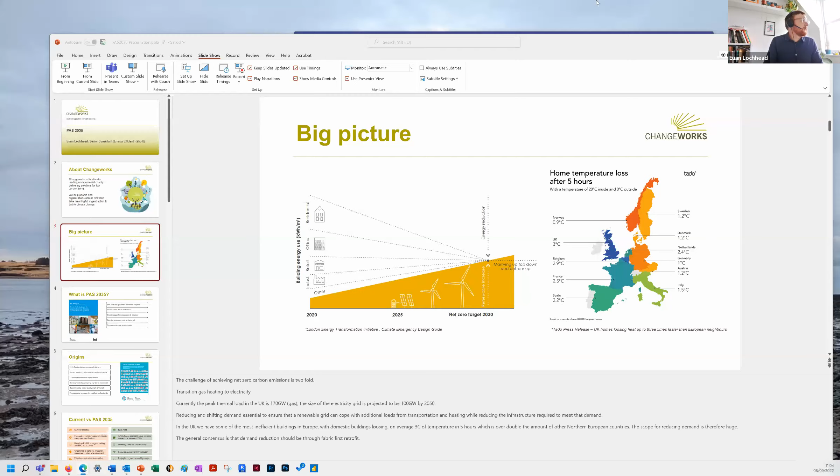Right. Right, is that better? Is that cycling through? There we go, that's it, yeah. Right, good, sorry. Yeah. Lovely, thank you.

So yeah, it helps when you can see these when I'm describing the challenge. So really, this shows what I was talking about just there, that the general consensus is that demand reduction should be through fabric first retrofit.

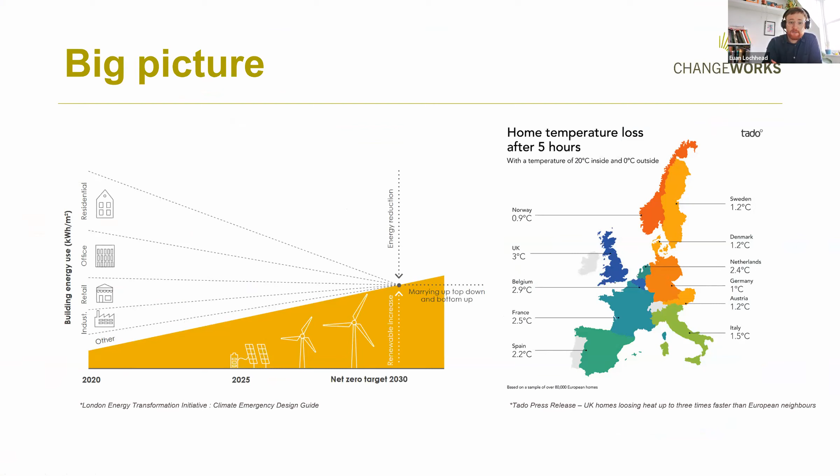So where does PAS 2035 come in? PAS 2035 is currently non-statutory guidance for retrofitting dwellings to improve energy efficiency. It's focused on a whole house fabric first approach to retrofit, and the key elements of it are that it requires an assessment prior to carrying out retrofit works to identify dwelling specific risks and constraints.

With the exception of the simplest measures, retrofit measures and interfaces between measures must be designed for the specific building, and the performance of buildings must be evaluated at the end to ensure predicted savings are achieved in practice. And it's also worth saying what PAS 2035 is not. It's not an energy standard. It's purely about this process of retrofit. So it doesn't set any targets for where we need to get to.

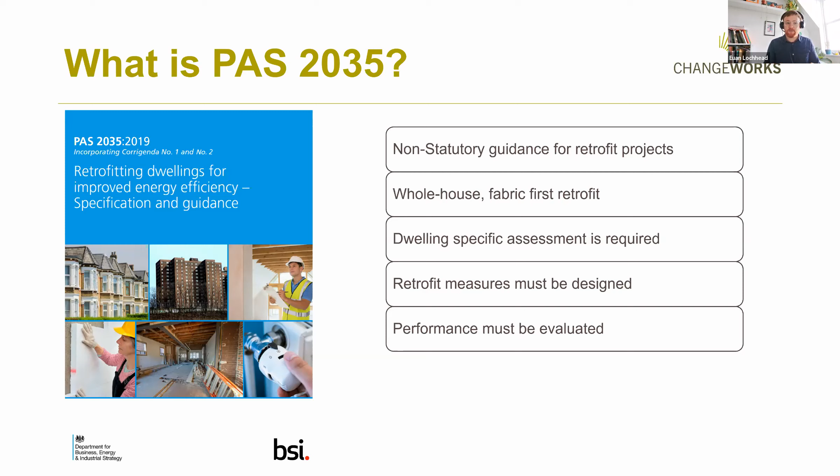The origins of PAS 2035 are in the Each Home Counts review, which was by the Department for Business, Energy and Industrial Strategy. And that review really found that current practice focused too much on single measures like you'd find in your EPC. And it gave 27 recommendations for improvement of domestic retrofit.

One of those was an overarching standards framework, which is really where PAS 2035 has come from, and their recommendation was that that was overseen by qualified professionals, and that there would be a new quality mark for retrofit, and that quality mark is TrustMark, which is the certifying body for PAS 2035 compliant retrofit in the UK.

So the difference between current practice and PAS 2035. Current practice, as I say, is focused on single measures. And when I say single measures, it's usually recommendations from an RdSAP assessment. And currently grant funding has kind of been designed around these measures. And PAS 2035, by contrast, looks at a whole house approach. So considering the interaction between energy efficiency measures, for example, the impact that improving insulation has on ventilation, and I'll go into that in a bit more detail later.

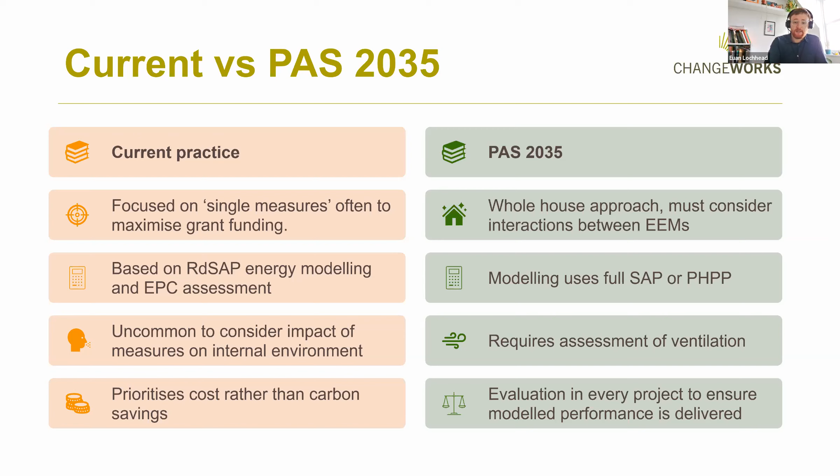In current practice, it's uncommon to consider the impact of measures on the internal environment, whereas one of the key aspects of PAS 2035 is to ensure that the measures carried out don't lead to inadequate ventilation, for example. Current practice prioritises cost rather than carbon savings. PAS 2035 balances both cost and carbon savings, and also includes evaluation to ensure that projects are delivering the energy performance that they were modelled to deliver.

And a key bit of terminology in PAS 2035 is unintended consequences, and this is what we're looking to avoid through using PAS 2035. So in current practice, some of the unintended consequences of poorly designed retrofit measures have been fabric decay through failure to consider the moisture balance of the existing building and how adding insulation disrupts that balance. That can lead to surface mould and condensation.

That can lead to poor indoor air quality on its own, but also unintentionally improving air tightness can make natural ventilation no longer suitable for the building. Improving insulation can sometimes also lead to overheating, which we might have experienced this summer. The fabric decay in historic buildings can lead to the loss of historic buildings.

And also there's the performance gap, which is the difference between the predicted energy performance from, for example, RdSAP and what's actually been achieved, which is dependent on numerous things such as occupancy factors and the accuracy of modelling. There's the rebound effect, which is not actually knowing exactly how much energy someone uses before. For example, people might underheat their homes if they're in fuel poverty. So the actual savings are less than you would expect.

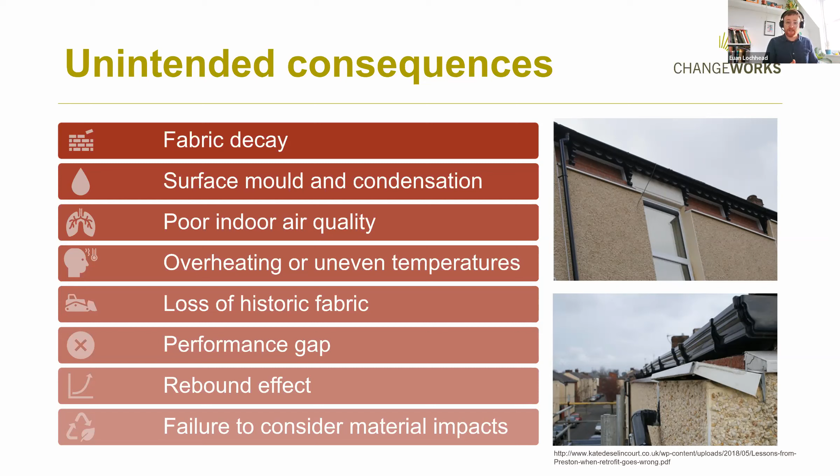So the photos here show some examples of poor retrofit where you've got discontinuous insulation or water not shedding but actually shedding into the building. And in this particular project in Preston, the remediation of those retrofit measures actually cost more than the original retrofit scheme. So we really want to avoid that.

Is it required? This is really the big question. Currently, it's only required for ECO-funded projects, but it is being considered in Scottish Government reviews of energy standards. The response to the ZEST report was that there were plans for a Scottish trust mark, which follows the principles of PAS 2035, but takes into account some of the key challenges we have in Scotland around the supply chain and the skills, which might mean a phased implementation.

But it's fair to say that there's uncertainty about how PAS 2035 is going to be implemented in Scotland and when it's going to be implemented. But there are plans to formalise PAS 2035 as a British standard. I think, in summary, while it's not required just now, it's likely to be required at some level soon, and it's likely to play a key role in the mass rollout of retrofit required to achieve net zero.

So what does the process look like? I'll explain this in more detail in the next slides, but the whole retrofit process is overseen by one professional who is a retrofit coordinator. So the retrofit coordinator is a building professional that has a specific qualification in managing risk in retrofit projects.

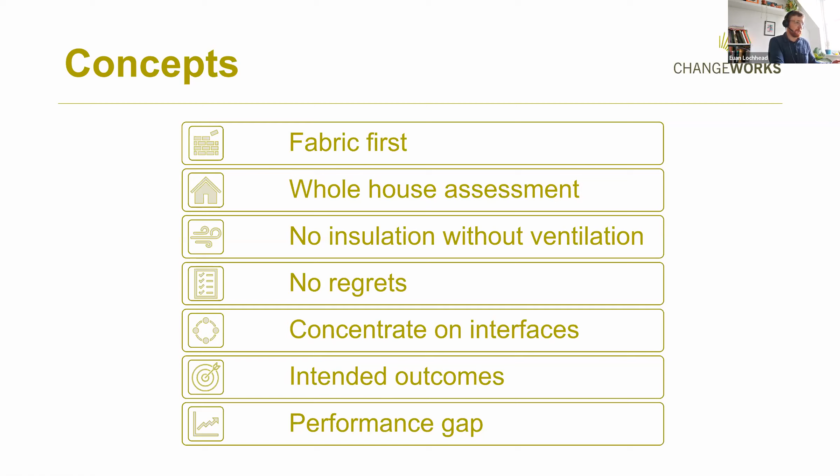And intended outcomes is another key concept, is that we need to establish what we want to achieve, whether that's net zero or whether that's just slightly improved comfort, so that we can establish the performance of the project. And then also the performance gap, trying to reduce the difference between our modeled energy consumption and what we actually achieve in practice.

So just to explain in a little bit more detail of the steps, in risk management, and this is really the first step of PAS 2035, when a retrofit coordinator establishes which risk grade a project has when it's going through each step. So there's 3 risk grades, A, B, and C. So risk grade A requires very simple assessment of the building, whereas risk grade C requires a more comprehensive assessment.

I think for most registered social landlords, projects will be risk path C due to scale, because risk path C comes in when there's more than 30 properties to be improved in a project, or more than 5 measures per dwelling. And I think to get to net zero, it's likely that most projects would be risk path C. Some measures are more inherently risky than others. For example, internal wall insulation has more chance of disrupting the moisture balance, and air source heat pumps require potentially fabric upgrades, so they're always risk path C.

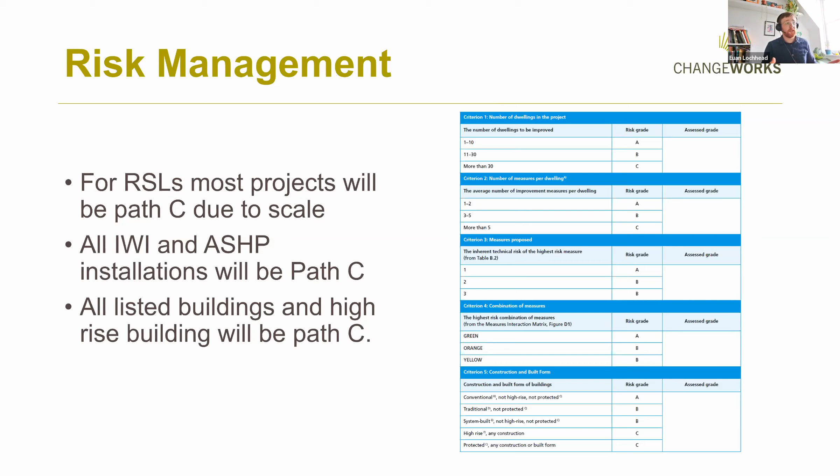And all listed buildings and high-rise buildings are risk path C because of the increased experience of the design team that you need to undertake those projects. And the listed buildings and traditional buildings, all pre-1919 buildings, require someone with conservation expertise.

So once you've established the risk, you can move on to retrofit assessment, and that's based on the risk assessment. And it's really to form an understanding of the existing building, the defects, to make sure that they're remedied prior to installing retrofit measures, and also to understand the moisture characteristics of the current building fabric. This is supported by energy and technical modelling to establish a baseline performance, so that when you get to the monitoring stage, you can understand exactly how much energy you've saved, rather than currently we'd base it on an RdSAP assessment, which might not be representative of the actual energy consumption.

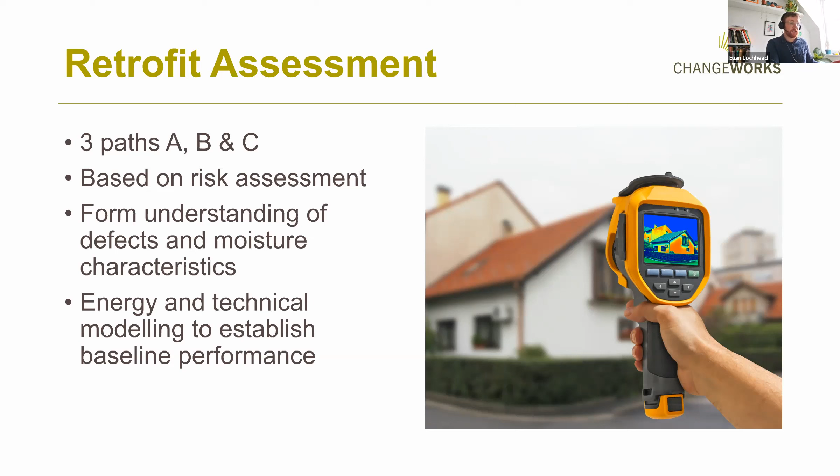Another part of the improvement option evaluation is to establish the payback period and also the carbon savings of each measure, to ensure that we've looked at what's the most cost-effective way to reduce carbon emissions based on a number of improvement packages. And as I've said before, this is based on more detailed energy modelling than currently, more detailed than RDSAP, which has the effect of improving the accuracy of modelling.

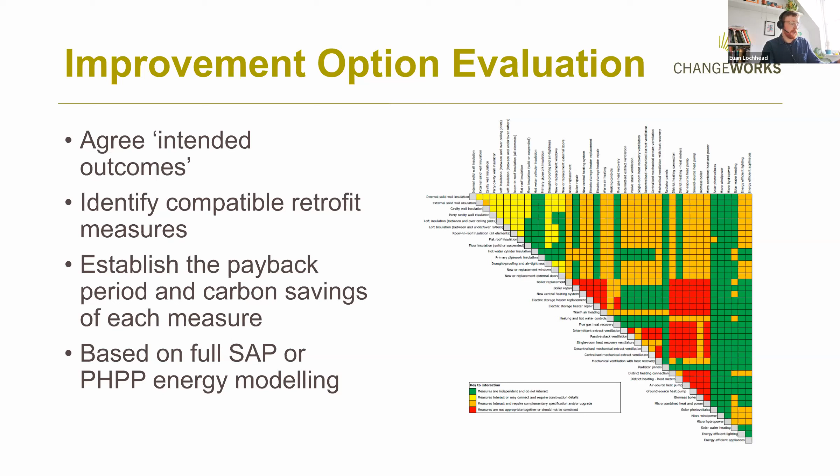Then when we move on to retrofit design, that needs to be tailored to the risk path as well. So more risky projects require more design, and that needs to consider junction details for insulation, the ventilation strategy, overheating assessment, interaction between measures, so how measures actually interact in terms of, as I've said, insulation and ventilation, or services and fabric heat loss, for example.

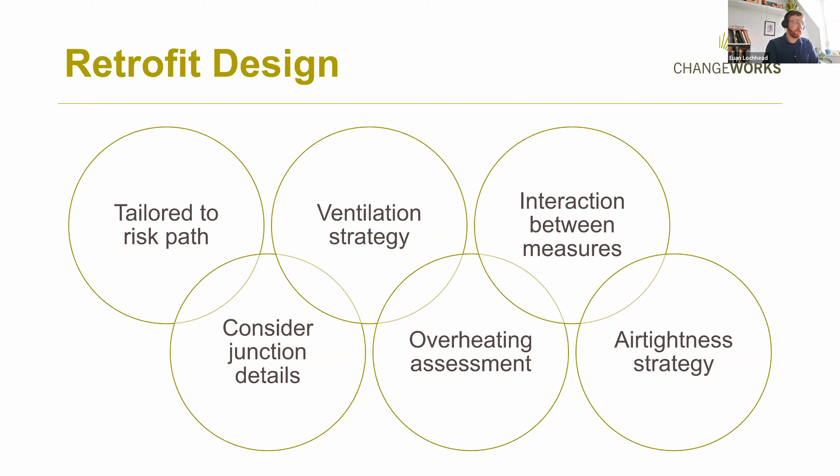And we also need to have an air tightness strategy, so that when we put on insulation, we're not increasing the moisture risk through unintended air infiltration, actually putting a lot of moisture into the building fabric. And then installation is carried out in accordance with PAS 2030, and Jonathan will describe some of the installation projects that Warmworks have done.

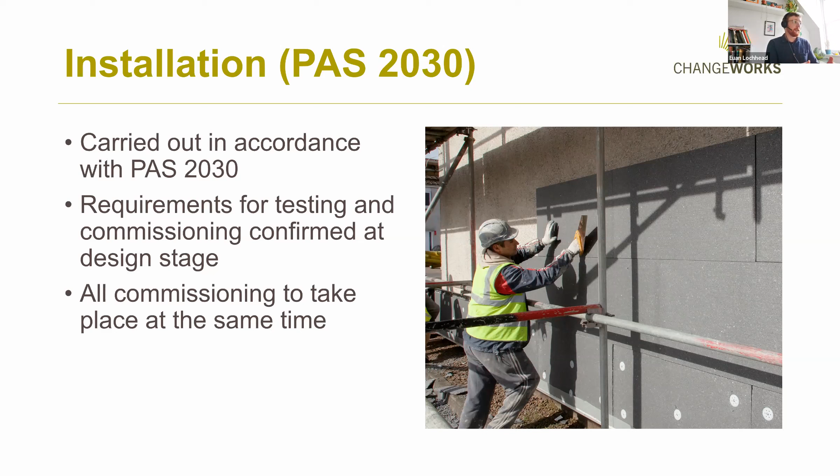And this really covers the requirements for testing, commissioning, and that needs to be confirmed at the design stage. So the retrofit design informs the installation.

And then finally, evaluation. So in every project, you do a basic evaluation, and if it's performing as expected, then that's great. But where it's not, you need to undertake further evaluation to identify exactly where the problems have occurred. And the advanced monitoring might include detailed technical monitoring, such as thermography, air pressure testing, or temperature and relative humidity monitoring.

So the key challenges to achieving PAS 2035: we have a skills gap in Scotland, and in the more rural areas that's more acute. So we need training. Currently the training is mostly provided by the Retrofit Academy down in England, but there are online courses. But it is a big challenge to upskill the industry to meet the step change in practice that PAS 2035 presents.

There's also measures-based funding, which can make it difficult for PAS 2035, partly because, for example, ventilation doesn't have any specific funding, and it doesn't improve EPC ratings, despite the fact that it does, when implemented correctly, improve occupant comfort and can lead to significant energy savings in practice. And there's also uncertainty over implementation, so we don't know to what extent PAS 2035 is going to be used in the retrofit of Scottish housing stock.

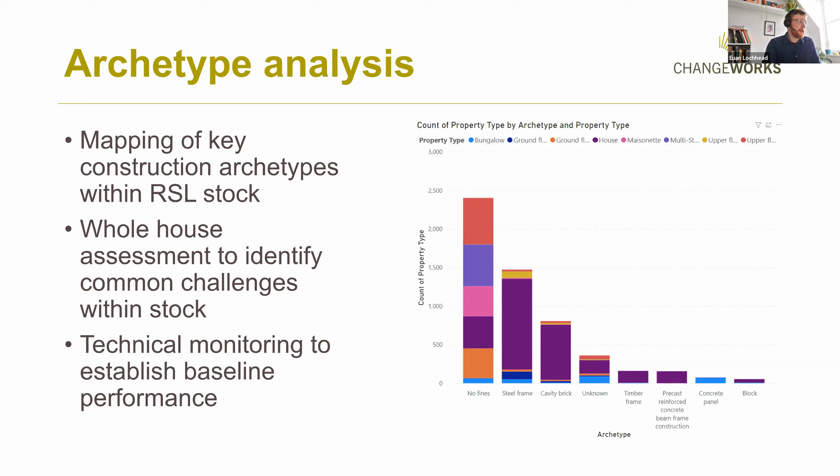So as I've said, archetype analysis is looking at different types of housing within a local authority or housing association stock, and then identifying the construction type. And usually these construction types will have similar approaches that we can implement. So that goes into the strategy development, that we can look at developing a single strategy for a housing stock

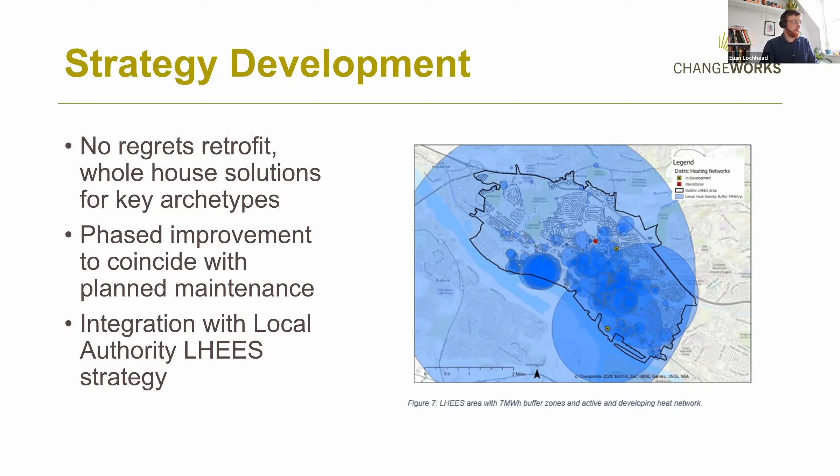based on the construction type, and look at implementing that to coincide with planned maintenance, and also look at integrating with local authority local heat and energy strategies. It makes sense for local authorities and housing associations to be speaking to each other to ensure that we're not significantly retrofitting a project when there's a heat network being installed right next by that requires a different level of heat demand. And we're also looking at integrating PAS 2035 into our delivery.

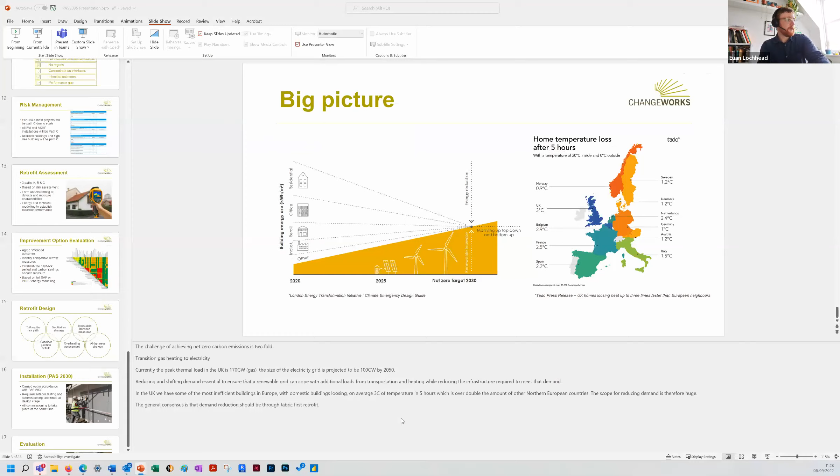So retrofit coordination, this is a service that we can provide from inception to completion. Project management: our team is currently experienced at delivering energy efficiency measures at scale, but we're looking to add the retrofit coordination services into this part of the work that we do, and also quality assurance, our team, to ensure that the appropriate standards and on-site evidence are gathered to ensure that TrustMark accreditation can be achieved when that's rolled out in Scotland. So I'll pass on to Jonathan now for the Warmworks presentation.

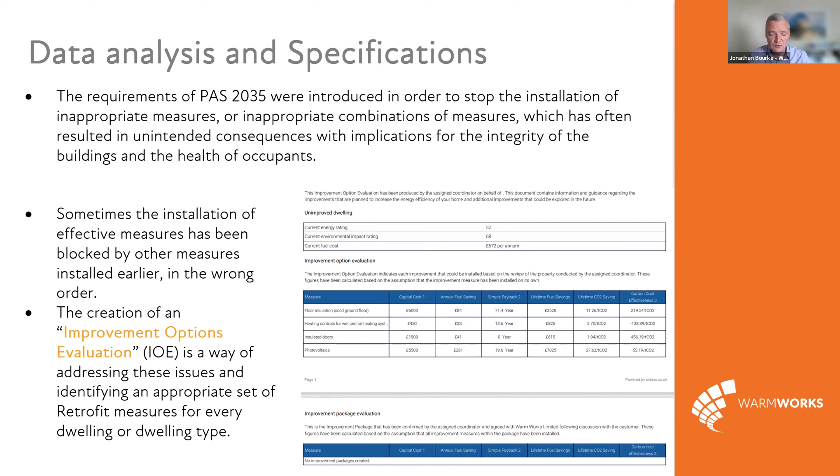And essentially all of that is bundled together by the retrofit coordinator, as Ewan mentioned, to create a medium-term improvement plan, which is lodged at the data warehouse, looked after by TrustMark. And the idea behind that, it will sit there for 30 years at least, and that will inform future delivery programmes. So one consideration around the Local Authority Delivery scheme phase 2 that we're just in the process of completing the delivery of is that there's a £10,000 per dwelling budget within that.

Now, quite obviously, the EPC and the improvement options evaluation might recommend that the person has fabric upgraded within their house, so EWI typically, with the associated ventilation that will be required to remain compliant with PAS 2035. But it might also recommend a heat pump. It might also recommend solar PV. And it's important to be aware that there's not very often money to cover all of the above.

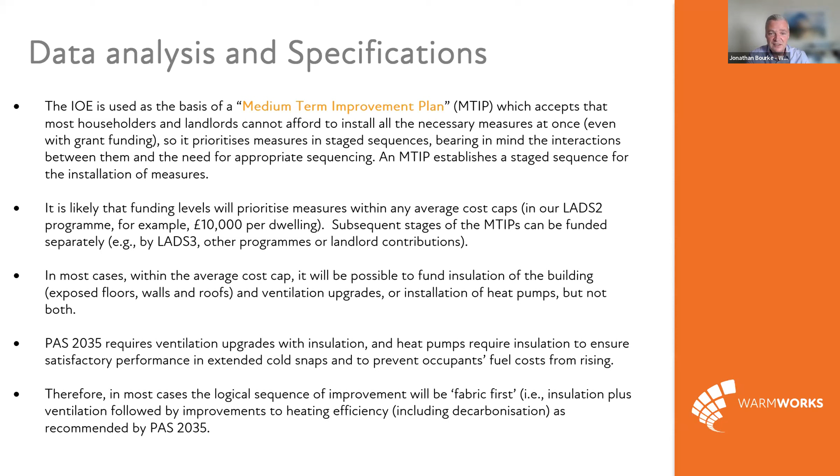So it's important that when we look at the sequencing of measures that are going to be installed, that's done in a nice, compliant and clear manner for everyone involved, but also leaving the client, whether that's you as a housing association or the energy hub if need be, with further information about future installations that could take place as part of subsequent funding programmes. And this all relates into the actual technical specification associated with it.

So when I read through the Greater South East's tech spec on day one, it was a bit of a trip down memory lane, because a lot of the content within that was broadly very similar to what we find within the Retrofit Academy's Midlands Retrofit Toolkit, as they call it. So I'd highly recommend a download of that, folks, because that will run through a lot of the pre, mid and post-install considerations as part of setting the scope of any works you intend to conduct.

It's also as well to keep sight of what standard are we working towards. So is this all about EESSH2? Is it with the obligation to look at EPC Band B by 2032? Are we looking at SAP increases across the board? Are we focusing on energy, as we see perhaps south of the border with the release of the Social Housing Decarbonisation Fund, with a requirement to hit minimum energy consumption per square metre of properties?

Or are we looking at a mass decarbonisation programme and getting rid of fossil fuel burning appliances to replace those with net zero or low carbon heating? But also, will we be working to other standards? So the Passive House EnerPHit or the AECB CarbonLite.